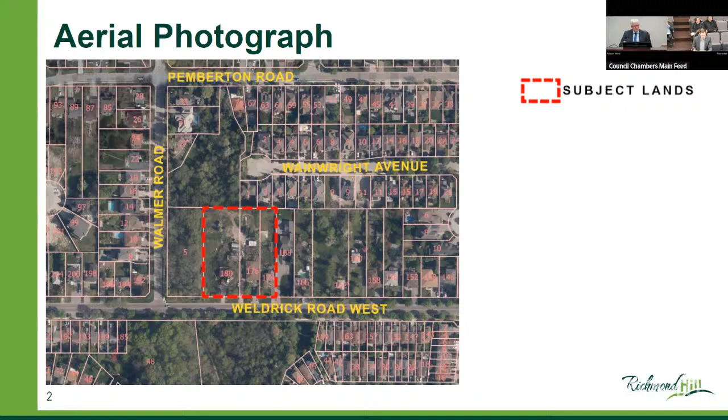The subject lands are currently designated neighborhood in accordance with the city's official plan. The neighborhood designation permits low-density residential uses such as single and semi-detached dwellings, as well as medium-density residential uses, subject to specific criteria of the plan. The lands are currently zoned second density residential, R2 zone, and flood zone under Bylaw 2523 as amended. The R2 zone, which applies to the eastern portion of the lands, permits single detached dwellings, among other uses. The flood zone, which applies to the southwest corner of the lands, permits conservation, forestry, and recreational uses.

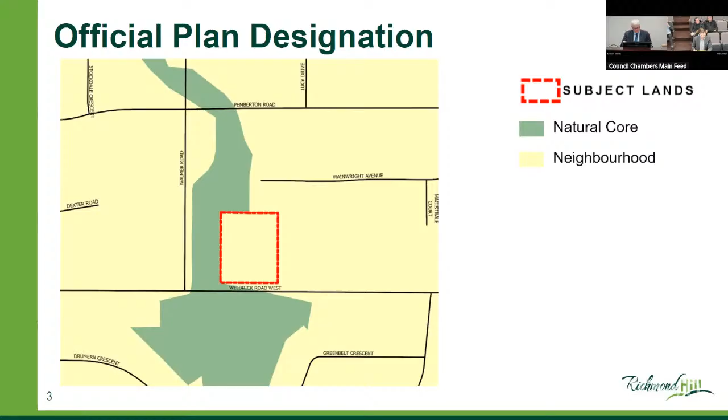The applicants are seeking council's approval of its official plan and zoning bylaw amendment applications to permit a low-density residential development comprised of 12 single-detached dwellings. The proposed single-detached dwellings are to measure 3 stories in height with access from a private condominium road. Each of the proposed dwellings is to be designed to accommodate up to 2 additional residential dwelling units. Further, the applicants are proposing to retain and expand the existing dwelling presently located at 180 Weldrick Road West.

Given the presence of a floodplain, the official plan amendment application seeks to amend the policies with respect to natural hazards, specifically to permit the proposal within hazardous lands and to reduce the minimum protection zone of 10 meters associated with hazard lands. The zoning bylaw amendment application seeks to rezone the lands to 4th density residential, R4 zone, under Bylaw 2523 as amended, to permit the proposal with site-specific development standards.

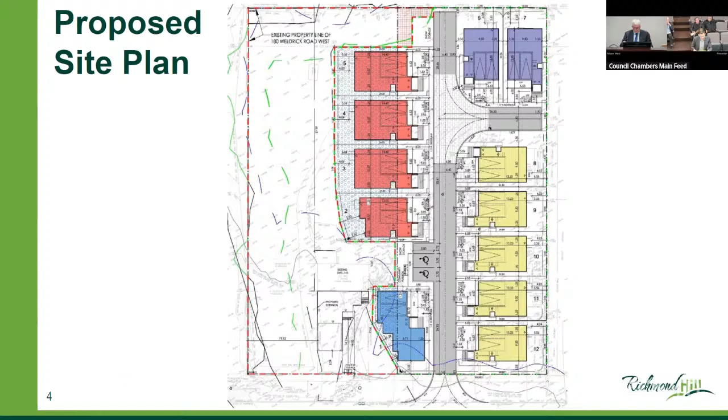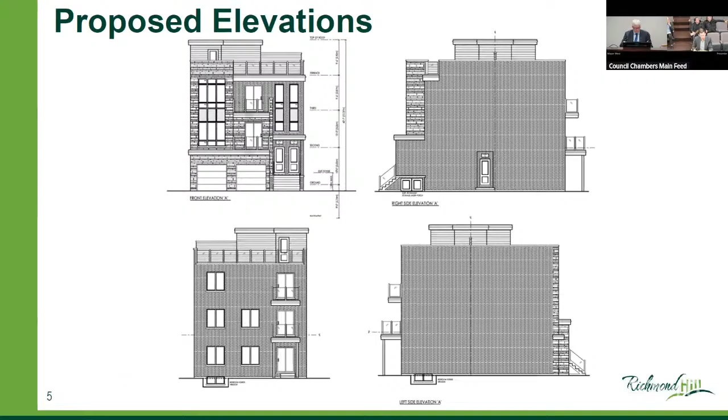Planning staff have circulated the subject applications to internal departments and external agencies for review and comment. The purpose of the report is to provide council and the public an overview of the development proposal and has been structured for information purposes only, with a recommendation that all comments be received and referred back to staff for consideration.

And who do we have speaking for the applicant?

Hello, good evening. Thank you, Mayor West, council members. My name is Thomas Dabowski from MHBC. We're the planning consultants representing our client's interests regarding the proposed official plan and zoning bylaw amendment application.

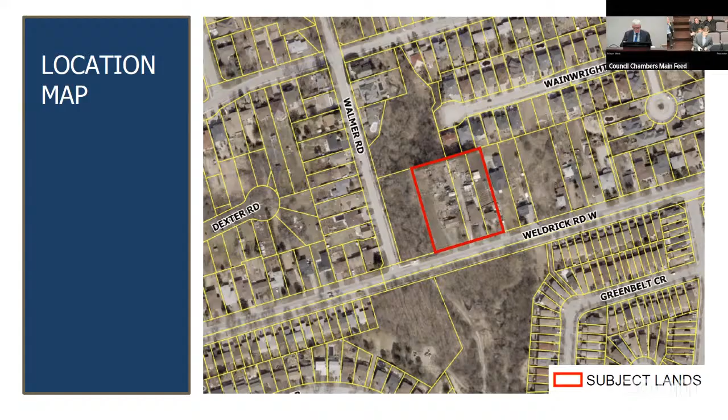As noted, the subject lands comprise 3 contiguously linked properties, municipally known as 174 through 180 Weldrick Road West. When reviewing the high-level project statistics, the proposed development essentially develops approximately 60% of the subject lands, generally within the eastern and central portions of the site.

The western portion of the site, located closest to the adjacent hydrological feature and natural heritage features including its vegetation and trees, is proposed to be retained. The proposal provides approximately 5,000 square meters of new residential GFA on the site. It provides 12 new 3-story single detached dwellings and also retains and will further expand the existing 180 Weldrick Road West dwelling, for a total of 13 dwellings on the site.

It provides a total of 51 new parking spaces on the subject lands, consisting of 48 residential spaces, essentially 4 residential spaces per lot, as well as 3 visitor parking spaces.

This is an overview of some of the submission materials prepared and submitted to ensure a complete OPA-ZBA application submission. This includes a natural heritage evaluation study, a functional servicing and stormwater management report, just to name a few. Overall, these materials collectively demonstrate that the proposed development can be appropriately accommodated and can function on the subject lands.

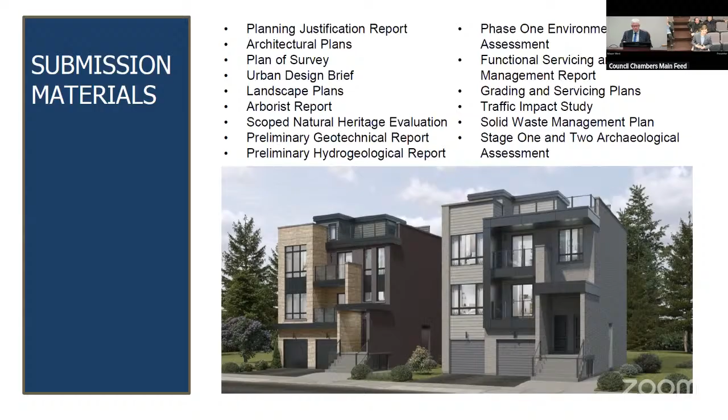This is the site plan. As was noted, the proposed development generally occupies the eastern and central portions of the site. The proposal gains access by way of 1 private road, which extends northwards off of Weldrick. A sidewalk is provided along the western edge of the private roadway.

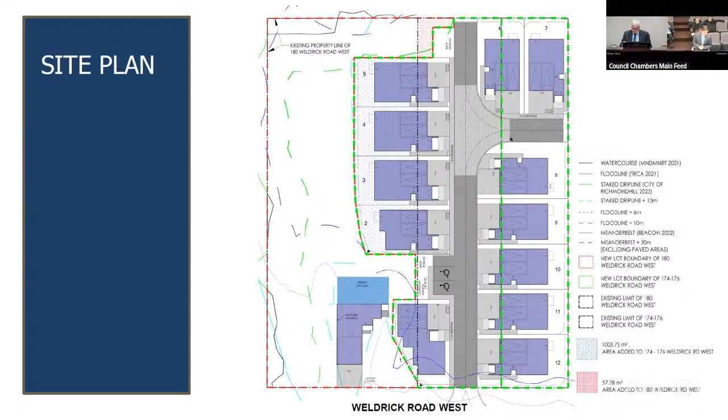3 visitor parking spaces are provided to the north of the first dwelling. You also have 2 snow storage areas on site, 1 to the west of the visitor parking spaces, and a second larger area located to the west near the northern terminus of the roadway.

To add a bit more detail, the landscape plans provide much more information regarding the wide range of both hard and soft landscaping interventions proposed across the site. This includes street-facing tree planting and boulevard enhancements, landscaped front yards and rear yards, pathways and decorative paving treatments, outdoor furniture and plantings, all intended to foster a pleasant and functional living environment.

These landscaping interventions intend to support the day-to-day well-being of residents and visitors, but also to enhance the streetscape quality and contribute meaningfully towards the public realm as experienced from Weldrick Road West.

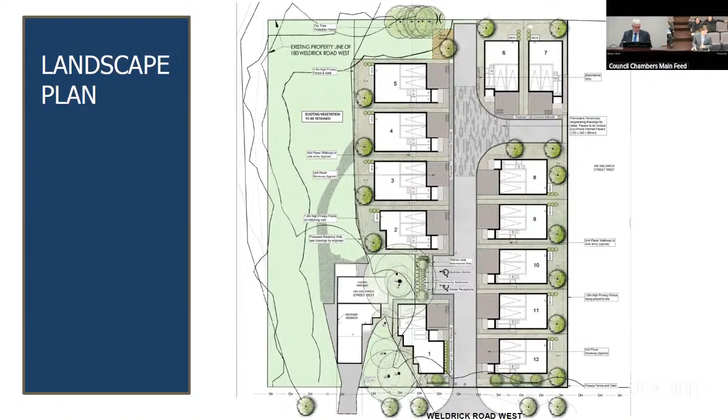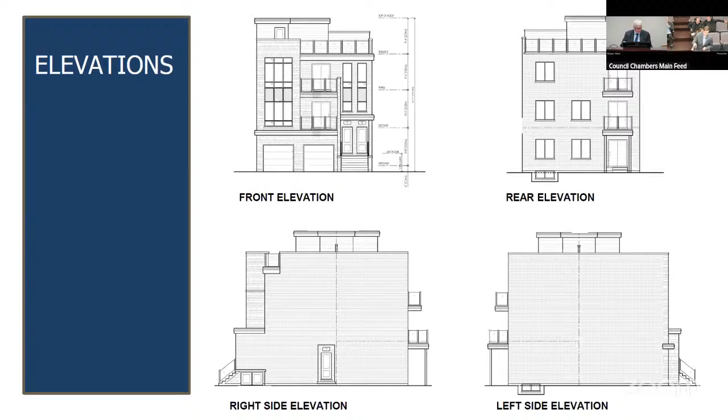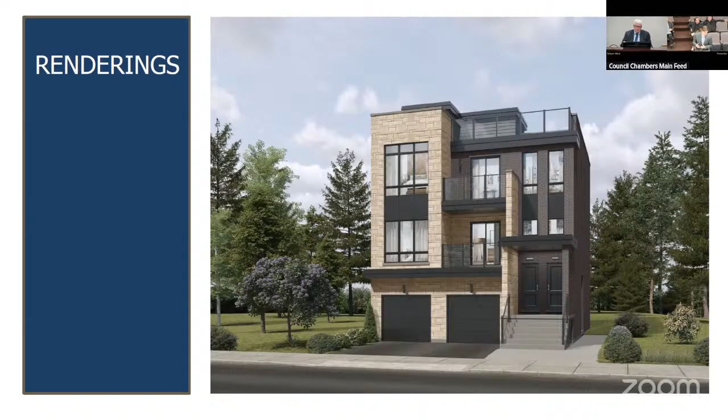To briefly conclude, these are some of the renderings which provide further illustrated detail on the proposed development and demonstrate the architectural quality being pursued. This is the first rendering, which provides a more traditional treatment with a uniform brick facade and warm color tones. This is a second rendering that might be further explored, containing a more contemporary aesthetic, utilizing deeper materials and enhanced articulation.

Now this is them side by side. In both cases, the design reflects a commitment to high-quality materials, clear architectural rhythm, and thoughtful massing, with further details to be advanced and explored as part of the project's detailed design stage.

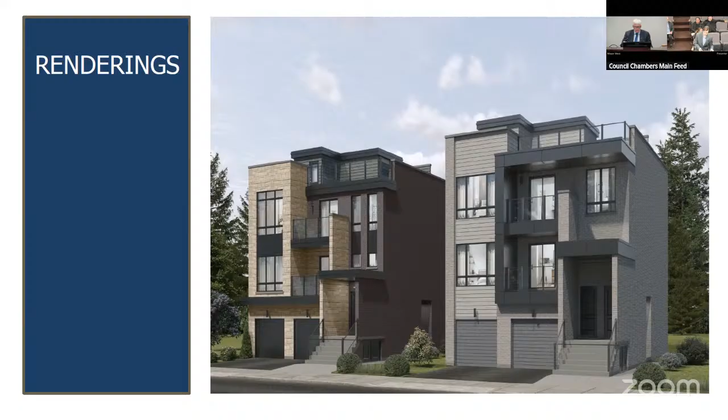This concludes our brief presentation. We welcome the opportunity to respond to any questions or comments. Thank you very much.

And now we have one person signed up already as a delegation from the public, Yelina Goran.

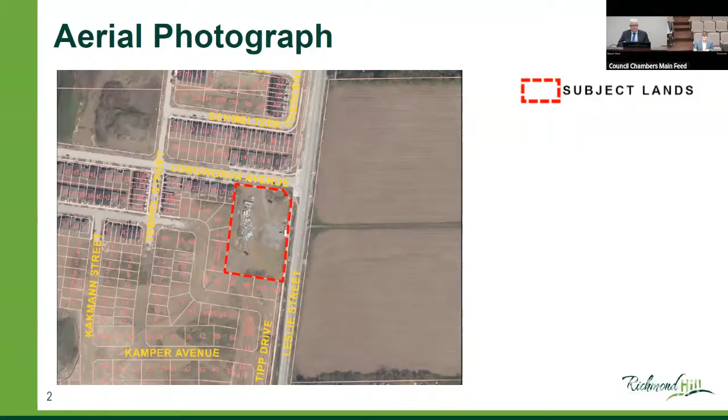The surrounding land uses include single detached and townhouse dwellings to the north, agricultural lands within the Oak Ridges Moraine to the east, and single detached and townhouse dwellings to the south and west, which are currently under construction. The lands are designated neighborhood commercial in accordance with the city's official plan. The applicable policies allow for a range of uses, including retail, commercial, and office uses. Development within the neighborhood commercial area is subject to a maximum building height of 2 stories. With respect to the current zoning, the subject lands are zoned neighborhood commercial zone under Bylaw 5415.

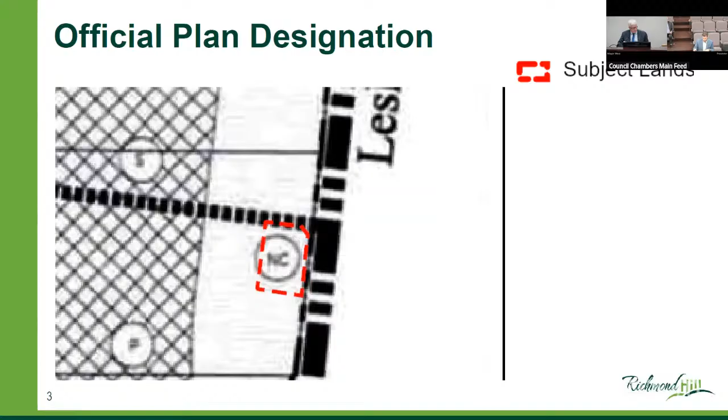Through these applications, the applicant is seeking approval to permit a high-density mixed-use development comprised of 2 5-story buildings at a density of 2.03 FSI, containing 201 apartment dwelling units. The proposal is to incorporate indoor and outdoor amenity space, a green rooftop, and underground parking. Access to the site is to be provided from Longworth Avenue.

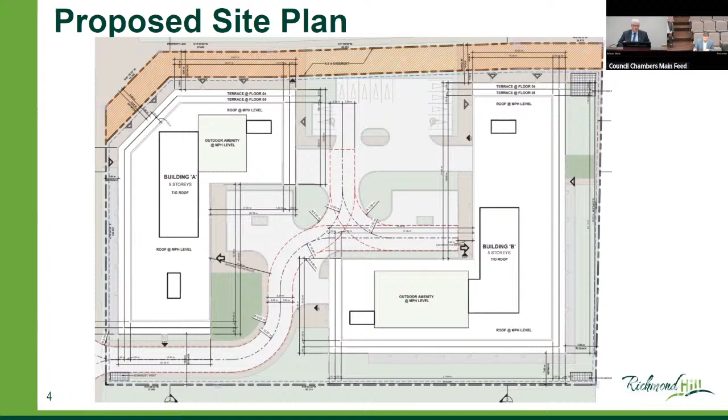The applicant's official plan application seeks approval to redesignate the subject lands from neighborhood commercial to residential mixed use and to add site-specific exemptions to include permissions to allow for high-density mid-rise residential and commercial uses, a maximum building height of 5 stories, permit outdoor amenity space on the rooftops, and permit underground and surface level parking. The applicant's zoning bylaw amendment application seeks approval to rezone the subject lands to residential mixed-use zone under Bylaw 5415 as amended, with site-specific provisions to implement the development proposal.

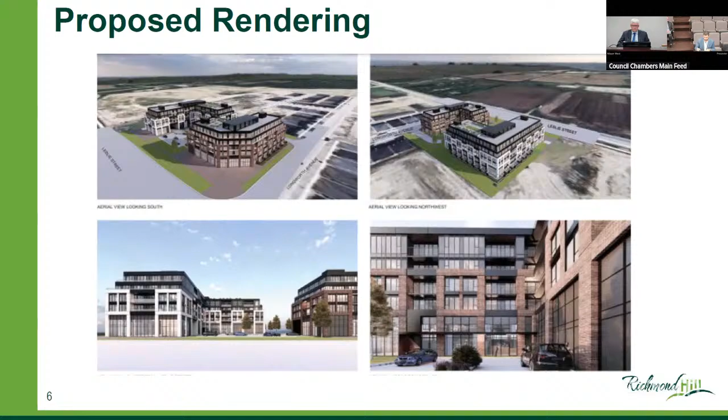Staff have circulated the applications to internal departments and external agencies for review and comment. The purpose of the report is to provide council and the public with an overview of the applicant's development proposal, and it has been structured for information purposes only, with a recommendation that all comments be referred back to staff for consideration. Thank you.

Okay, thank you very much. And let me see here who we got for the applicant. Who do we have? Okay. Hello, sir. How are you?

Good evening, Your Worship, members of council, staff, members of the public. My name is Keith McKinnon. I'm a partner with KLM Planning Partners, Inc. Also with me this evening is my colleague, Zanara Butt. Both of us have been working on this project. We're certainly pleased to be here before you this evening to present our proposal.

As Mr. Russo noted, we have filed an official plan amendment and a zoning bylaw amendment application to the city for 0 Longworth Avenue. The noted lands are at the southwest corner of Leslie and Longworth. Mr. Russo noted that it is about 0.9 of a hectare, just over 2 acres in size, with frontage on both Leslie and Longworth Avenue.

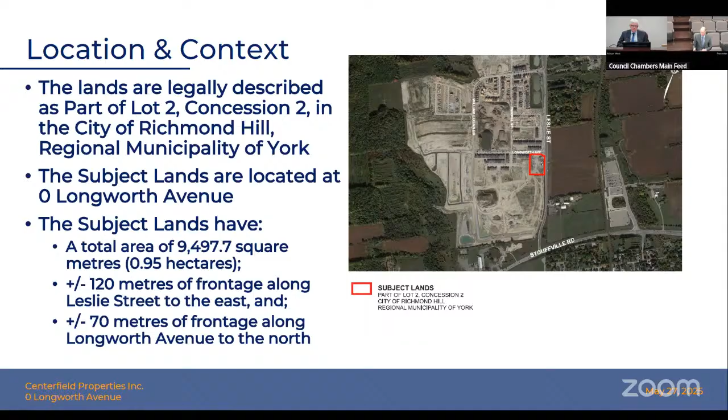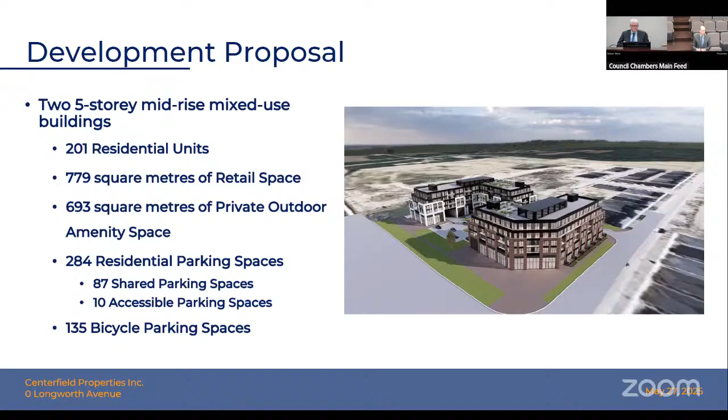The development proposal application is for 2 5-story mid-rise buildings, which would accommodate 201 residential dwelling units. We wanted to ensure this application didn't remove the commercial permissions that are there today, so we better integrated that into the overall development. We've included about 780 square meters of commercial floor space, enough to ensure community uses typically served by a commercial unit in the area can still be served by residents. We've also got about 690 square meters of amenity space, approximately 280 residential parking spaces, and 135 bicycle parking spaces.

Mr. Mayor, you hit the nail on the head earlier that we are all creatures of the province these days. The planning world and related policies are changing at an ever faster speed. With Bill 17, one of the major updates was what's now known as the provincial planning statement, formerly the provincial policy statement, provided to all municipalities, which applications must be consistent with throughout Ontario.

There are a number of different policies related to it; we've outlined a few here, but I won't go through them all. We still have the Oak Ridges Moraine Plan in place. When we were developing this overall community, ultimately approved by settlement at what was then known as the Ontario Municipal Board back in 2016, the Oak Ridges Moraine Conservation Plan formed a major part of this community.

We have the York Region Official Plan. The difference now is that this forms part of the City of Richmond Hill rather than York Region, so it now falls under the city's purview. We've got a number of different requirements and designations, all of which lend themselves to permitting development on the subject property.

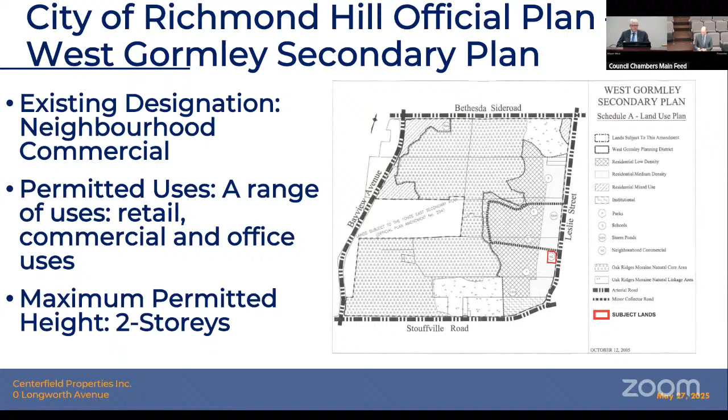We have the City of Richmond Hill Official Plan and the West Gormley Secondary Plan, which has been around for quite a long time. This site was, and still is, designated as neighborhood commercial in the West Gormley Secondary Plan. We appreciate the city is currently reviewing its official plan, which will likely include the West Gormley Secondary Plan, but our applications are already ahead of that scheduled timeframe.

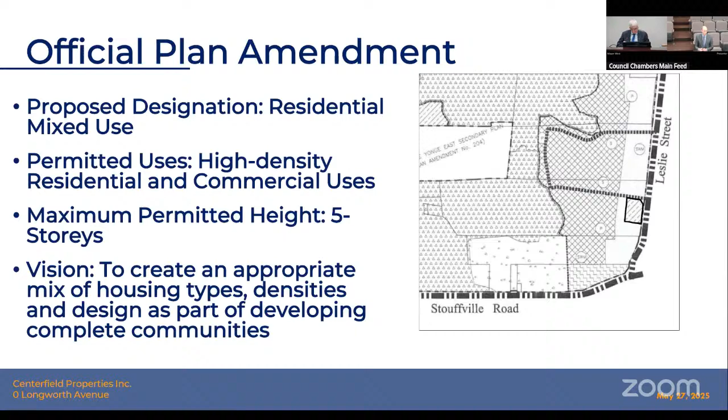In terms of our official plan amendment, as Mr. Russo noted, we're seeking residential mixed use on the subject site, allowing both residential and commercial uses up to a maximum height of 5 stories. This creates an appropriate mix of commercial and residential uses, ensuring a high quality development where residential uses are permitted in conjunction with commercial uses.

There are a number of policies related to the West Gormley Secondary Plan. I won't go through those, Your Worship and members of council—you're well aware of them—but for members of the public, these are policies we have to review as part of development applications, and we've done that here.

The current Richmond Hill City zoning bylaw—I'll just skip to the end here.

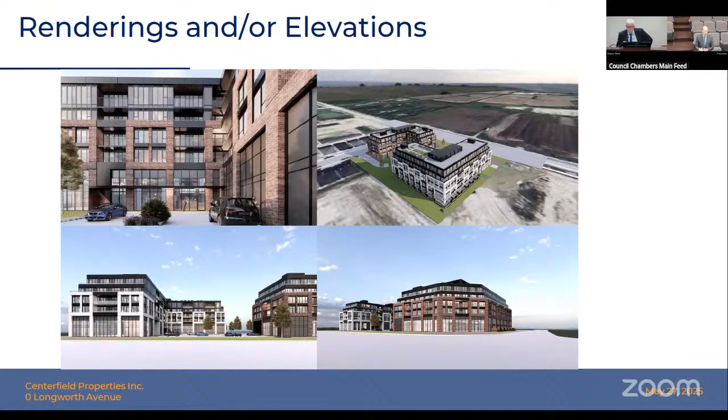As Mr. Russo noted, we do have some identified elevations. These are representative examples. Our client has retained a very high-quality architect, Turner Fleischer, to provide what we feel is a high-quality development for this location. It's an important location on a regional road at a major intersection. We feel the concept plan and renderings are representative of that quality, and these materials have been submitted as part of the application and are available with the city for review by any members of the public.

Okay, you're over time, so if you could just wrap it up, that'd be great. And that's it, Your Worship—happy to answer any questions that council or members of the public might have. Thank you, Mr. McKinnon.

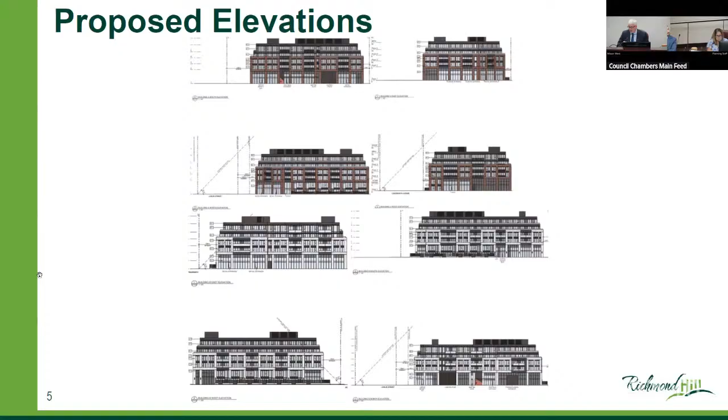And I guess the only other thing I would say, and I hesitate to even say this because there's more problems here than just this, but I was a little surprised to see on page 10 of the staff report that they haven't really even thought about affordable housing. It would seem to me that if you're going to propose something that's clearly bigger than what you're supposed to be doing in an area, that's probably what you should lead with.

There's just a number of issues with this application that really need to be looked at. I appreciate that the applicant has the right to apply for whatever, and as I said, this is the beginning of the planning process, so there's a lot of water to go under the bridge, so to speak, between now and then. But I think there's quite a bit of work that needs to be done here to get this application to a place where it fits in better with the neighborhood. So anyway, having said that, that's all my comments.

We have a motion on the floor to refer all comments back to staff. All those in favor? Opposed? That carries unanimously. Thank you very much.

And our final item of the day is the draft Richmond Hill Center zoning bylaw amendment, and that is going to be presented by Clement Chong. Clement, tell us all about the Richmond Hill Center in 5 minutes. I will try my best.

So good evening, Mayor West and members of council. I'm here to speak on the third and final item on the agenda tonight. The purpose of this presentation is to provide a brief overview of the key points and highlights of the Richmond Hill Center zoning bylaw amendment that will ultimately implement the policies of the recently approved RHC secondary plan.

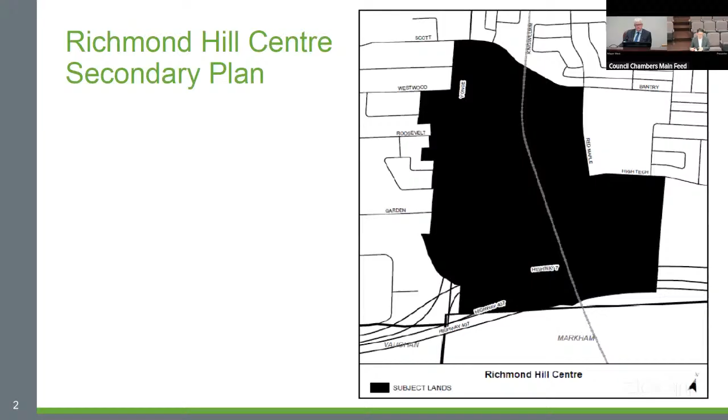To quickly recap and provide some context, the RHC secondary plan is generally located in the areas northeast of Highway 7 and Yonge Street, as identified on the map. The RHC secondary plan was approved at the OLT following the resolution of appeals in late 2024.

The purpose of the RHC zoning bylaw is to fulfill the Planning Act requirements, which stipulate that no later than 3 years after approval of the secondary plan, council must pass a zoning bylaw to support its implementation. Second, the proposed RHC zoning bylaw amendment includes permitted uses, restrictions, and development standards which implement the policies of the Richmond Hill Center secondary plan. The RHC zoning bylaw amendment is also one of the city's commitments under the Housing Accelerator Fund and must be completed within a specified timeframe to remain eligible for funding disbursements.

The purpose of tonight's meeting is to hold a statutory public meeting for staff to listen and receive feedback on the proposed RHC zoning bylaw amendment, with the intent that it will be brought forward to council for approval in September 2025. The draft zoning bylaw amendment proposes minor changes and updates that will bring the RHC into the recently approved centers and corridors components of the comprehensive zoning bylaw.

As required, it includes permitted uses and development standards such as lot coverage, minimum and maximum building heights, minimum and maximum density, maximum podium heights, angular plane requirements, step back provisions, and maximum floor plate sizes. The draft bylaw also includes 3 relevant schedules, which together will ultimately form part of the comprehensive zoning bylaw.

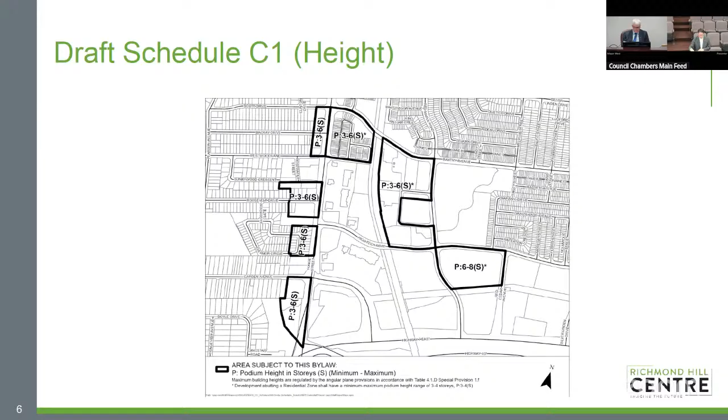This is done by way of angular plane requirements for transition areas that abut existing low-rise residential areas. Similar to density, the RHC secondary plan also provides some flexibility on angular plane by allowing minor projections when it can be demonstrated that impacts such as shadow, wind, light, view, and privacy can be addressed to the city's satisfaction. Again, if this relief is required, it will be administered by way of a minor zoning bylaw amendment process.

Second is the high-tech EMZO. The regulations of the EMZO take precedence over municipal zoning bylaws, and therefore these lands have been excluded from the draft zoning bylaw amendment as well. Finally, an upcoming batch of comprehensive zoning bylaw updates will introduce new citywide zoning for areas such as the Greenway, utility corridor, and the CNR. As such, these lands have also been excluded from the draft zoning bylaw amendment.

In conclusion, staff recommends that the staff report with respect to the RHC zoning bylaw amendment be received for information, and that all comments from tonight be referred back to staff for consideration. Thank you. Okay, thank you very much.

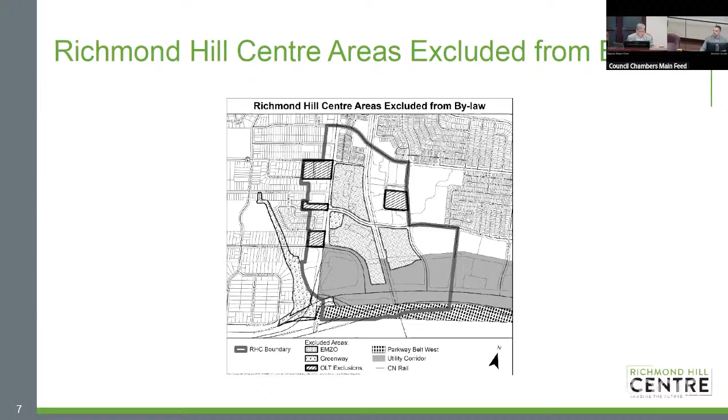So just to confirm, and I noted that on page 9 — through Mr. Chair, just to confirm, so between now and September, when the bylaw will be brought back, there will be no further public consultation, so to speak. Is that correct? Through Mr. Chair, we had a public open house last week, as you know. We're here at council public meeting today, and our intent is to engage directly with impacted landowners between now and September. We haven't heard a significant amount of feedback on this.

It's not a surprise, given that what we're doing here is implementing the Richmond Hill Center secondary plan, which had a very extensive consultation process associated with it through its developments. But we are committed to working with landowners that have an interest. And as you know, there was a landowner who had an interest at the open house, and that same landowner has submitted documentation to us today as part of this agenda. So we'll certainly follow up with them and anyone else who has an interest through the program.

Thank you for the answers, Mr. Chair. Yes, I did note that at least one, if not more, landowner would have comments. But effectively, the bylaw coming back in September will substantively already be here — isn't that attachment 1? Through you, Mr. Chair, the draft bylaw has been prepared, and that is what we're consulting on today. We will take feedback from council and the public, evaluate that feedback through the process, and potentially make revisions to the bylaw in advance of bringing it back to council in September, in advance of the end of September.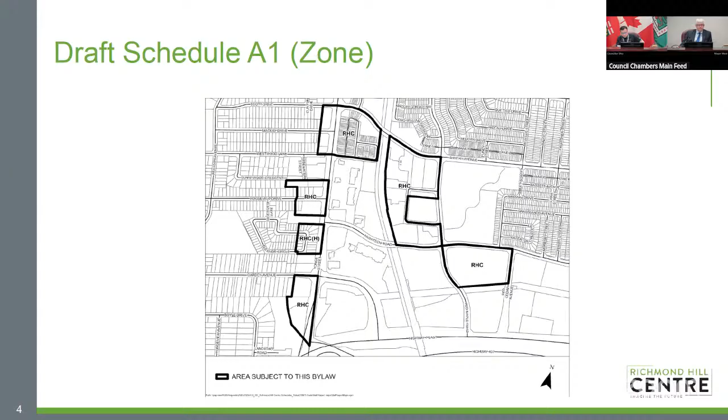And according to the next page, B1, it shows that the FSI, the density, could be up to 4 at the same area, which is obviously not the current situation. So that means if any future application wants to develop a high rise there, the density could be up to 4. So if the Richmond Hill Centre zoning bylaw designation applies to this area, could it mean that residents may be required to relocate? Am I correct, through Mr. Chair?

Am I correct, through Mr. Chair?

Through you, Mr. Chair, the plan doesn't envision the redevelopment of those townhouse complexes. To facilitate that would require a very complex consolidation that would be very challenging within the market. So the density contemplated in that area accounts for those existing townhomes remaining. It would be very, very challenging to see those sites redeveloped from a market economics perspective.

So it's not something we envision as likely or likely feasible, quite honestly. So that means no application could make this area FSI 4? Through you, Mr. Chair, that site is substantially built from our perspective. There may be small scale development on undeveloped lands, but for the most part that character area is primarily built, and the densities reflected there would be reflective of those uses continuing. Okay, I see, I got it now.

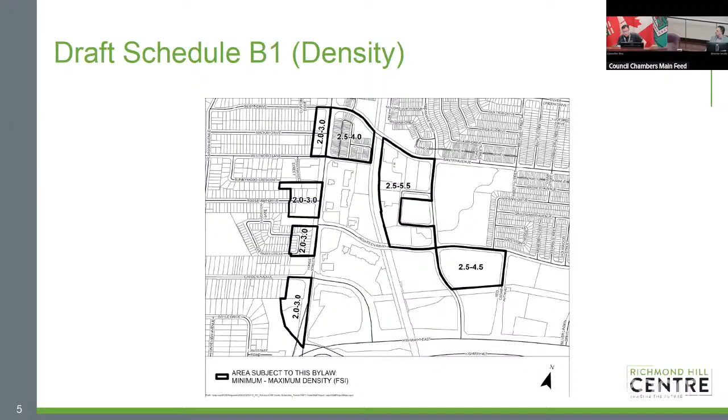My next question, and also the last question, is even if the city has zoning bylaw plans in place for the Richmond Hill Centre area, can any potential applicant or developer still appeal this zoning bylaw? For example, when they ask for greater density or increased building height, while submitting the application, can they appeal the zoning bylaw as well?

Through you, Mr. Chair, the city would consider site-specific rezoning applications on lands. The intent in pre-zoning these lands is to facilitate development in accordance with the secondary plan. We're allowing developers who meet the city's vision for this area to have the option of bypassing a zoning bylaw amendment process and move directly to site plan if they're in compliance with the zoning. The reason is to support the city moving towards achieving its housing targets.

We want to facilitate development that is in accordance with the community and council's vision for this area, and this is an opportunity to potentially streamline or fast track those applications. If someone has an interest in moving forward a development application not in accordance with the secondary plan, there would be another process to do that. The city would evaluate those applications within that context and make appropriate decisions. So this doesn't preclude that from happening.